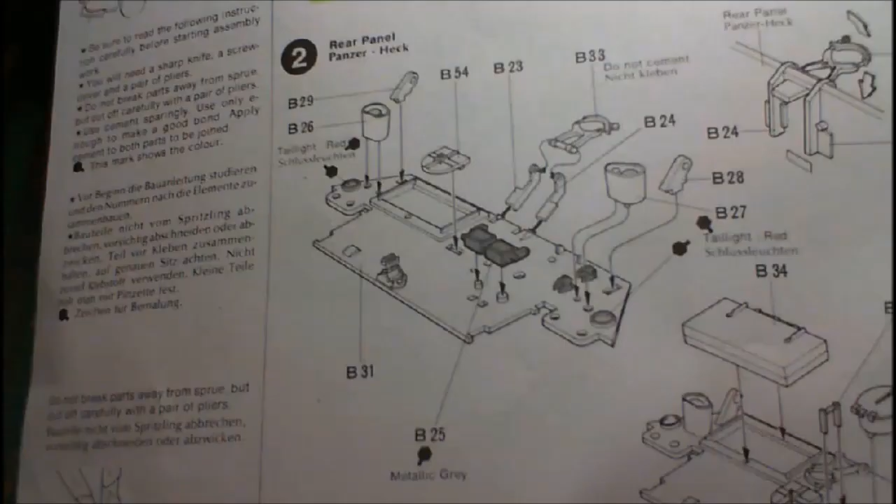Technical to the last, I'll give you all the technical explanations - fiddly things and jointy bits. So I'll get them done, come back then, as usual we'll have a look at that and see if there's any problems. When it came to the wheels, there was no problems, they just went together easy enough as we saw. Right, so I'm going to get step 2 done and come back, we'll have a look at it, let you know how all that went.

Okay, now that's step 2 done. Step 2, we have to get in the rear panel on - a couple of little bits and pieces that went onto it. We've got the travel lock for the barrel, that identification plate, the rear lights, lifting hooks, a bit of spare track. We've got a box of some kind, a round box of some kind, and 2 little thingamajiggies.

Like I said, watch this channel for technical information, you won't find a better one for technical information. And there we go, there's that piece all nicely made up now. And that piece is movable, that can pop up and down. Not that you can open it, but you can move it up and down - don't see the point, to be honest with you, but it works anyway. Lovely fitting of that piece.

Goes on the back there, and it is very strong. Usually a lot of these little fiddly things you're putting on little hooks and trying to get them in there, very, very fiddly, and that's with modern kits. This is an old 1979 kit, like I said, when we started off building this. And beautiful little fitting there on that.

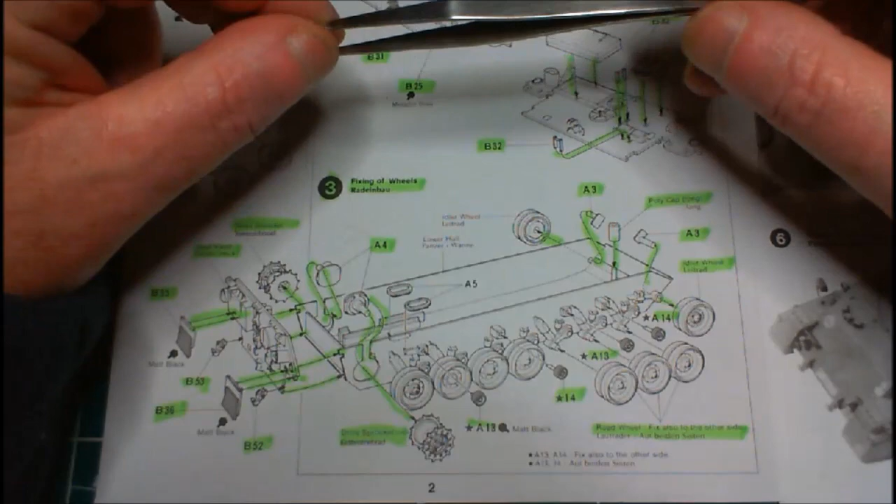Okay, here we are back with the instructions, and as you can see from all the little green marks, that stage is completed. I must say everything fitted together beautifully, it really did. No problems with fit whatsoever, no flash or anything to be removed - everything went together perfectly.

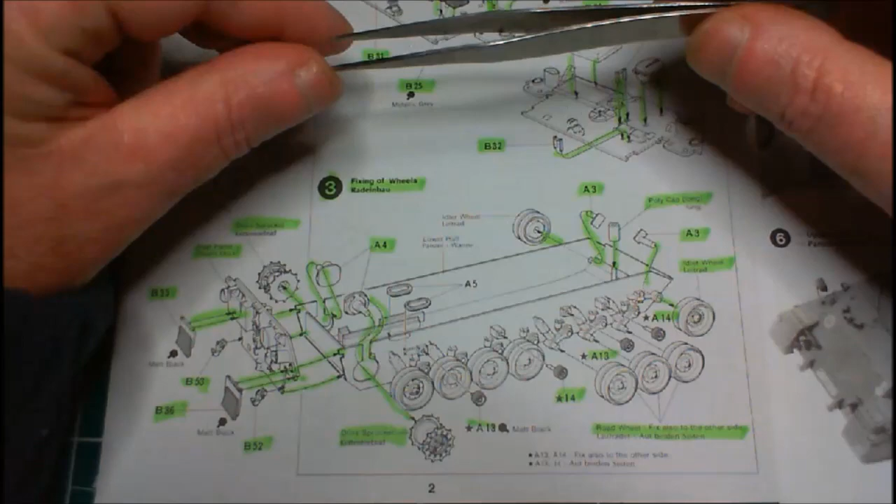Now, one thing I noticed going through the instructions - not that there are very many - is that at no point do they tell you about fitting the tracks, or when to fit them. I presume it's at this stage, because as you read through, the next step is the upper hull, then the turret, and basically putting everything together - and it shows the tracks already on this section here.

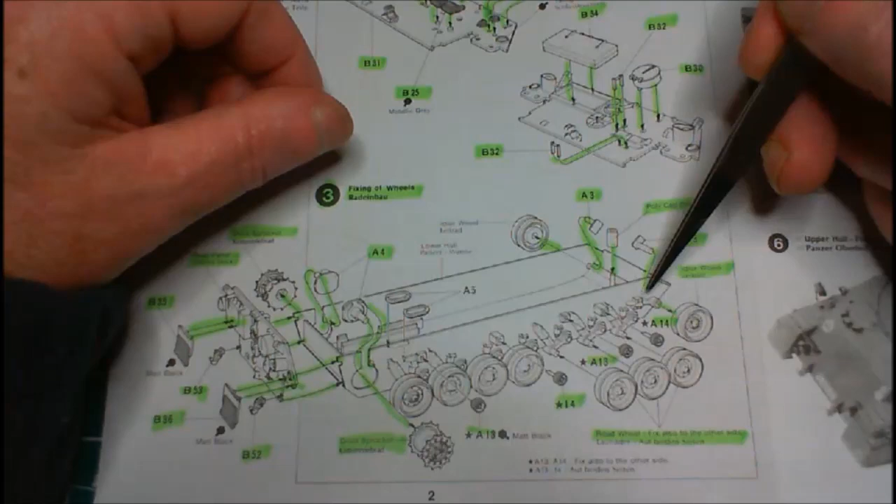Now, after going through a couple of videos of different people who've done this kit, one or two of them said the rubber tracks that came with it were extremely tight - yes, extremely tight. One person even said they broke the idler wheel mounting, probably this little piece here, when fitting the tracks, because they were so tight it just sort of snapped them in. He ended up having to get separate Meng tracks for it.

Okay, I'm after dry fitting the tracks - popping them in without heating or gluing them or anything like that. As you can see, they're not sealed off yet, but they fitted perfectly. They work - I had no problems with them whatsoever. So whether there was a problem noticed with earlier kits and they changed the tracks, I don't know, but these tracks so far - I haven't put the other one on yet, but I just did the one - and it's perfect. No problems with that.

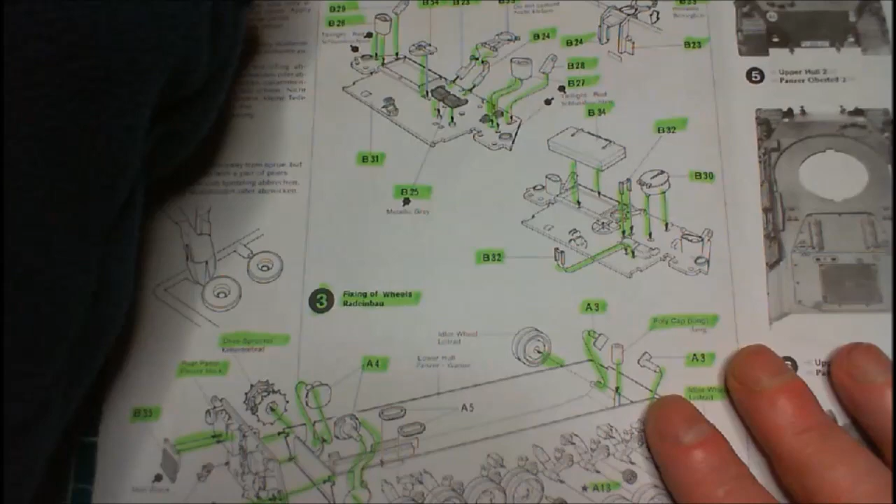We'll move on with the instructions and what we're on to next. I'll do the other track, and I'll do the sealing of the tracks as well. It's where you basically heat a screwdriver, pop them through like that, and then just seal them down, flatten it down a bit. Little hint with that is don't heat your screwdriver too much, under a naked flame of course, but don't heat them too much, and then slowly just mushroom the top of it so it seals it off.

As I said, I don't have a problem with those rubber tracks. Never really had a problem with any rubber tracks, but what the hey. Anyway, right, we're on now to the upper hull, and in step 4...

We're fitting on side skirts, some tools, and the big air vent there at the back. Step 5 is basically the same on the other side, as well as fitting this little piece here underneath, which is the little clip. It fits in under here, and it's the clip that keeps the top, joins the top and the bottom, under this section here, under that yoke there, so you can take your model apart and things like that. It's really for getting at the motor and changing the batteries out.

So let's carry on now with our instructions, and now we're onto the turret. First of all we've got to build up a couple of little sub-assemblies to get ready for the turret itself. We've got the smoke dischargers, left and right. We've got that main searchlight at the top.

That's a dual searchlight, I was looking up on that. It's both infrared and white light, so very nice.

We've got the machine gun, which, I can't remember the actual name of this one, but it's the updated version of the MG42, and it basically runs on the same concept as that, and it's still quite a formidable weapon used today.

We've also got our gun. It's a 2-piece barrel, well, a 3-piece barrel when you consider we've got the little top as well for it. Then we're fitting the light onto the gun mantlet and fitting in our gun itself. Then we're on to putting the turret sides and back and all that together.

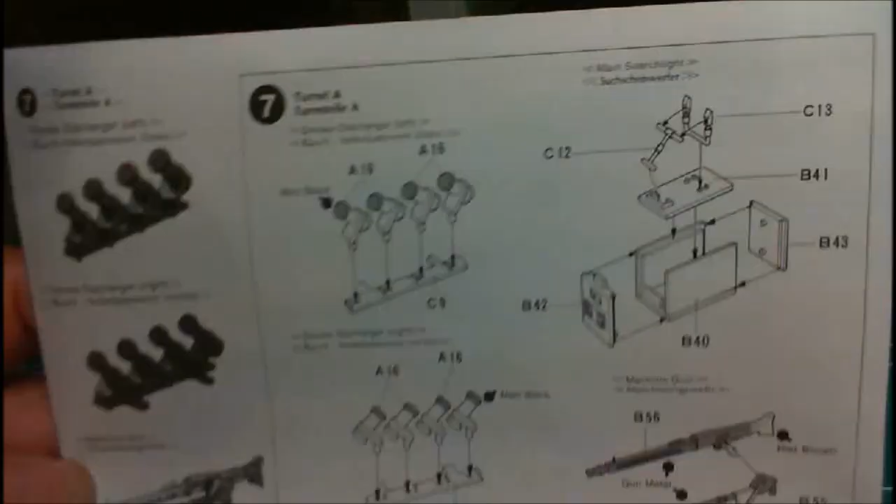So I'm going to get those 2 steps done, 7 and 8. Step 7 being a pile of little steps, getting all the little sub-assemblies done: smoke launchers, light, machine gun, main gun, and fitting all those little pieces onto the mantlet, then putting our turret box together. So I'm going to get them done, and we'll come back as usual and have a look at that.

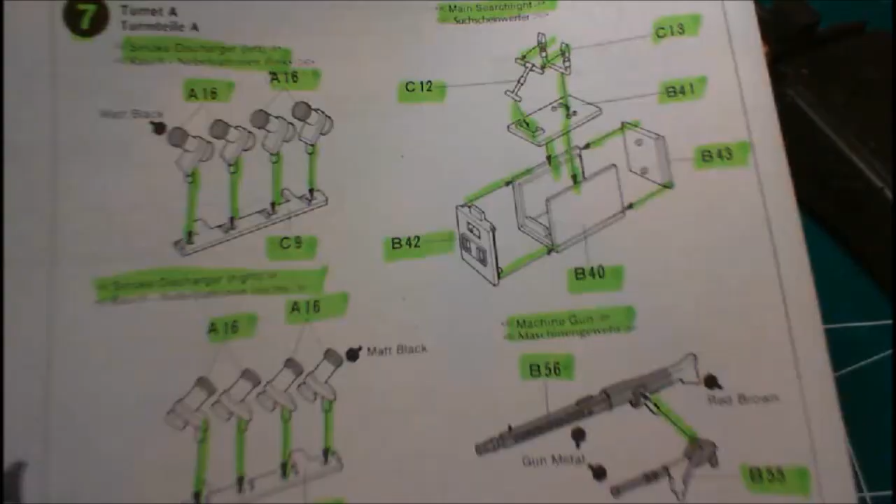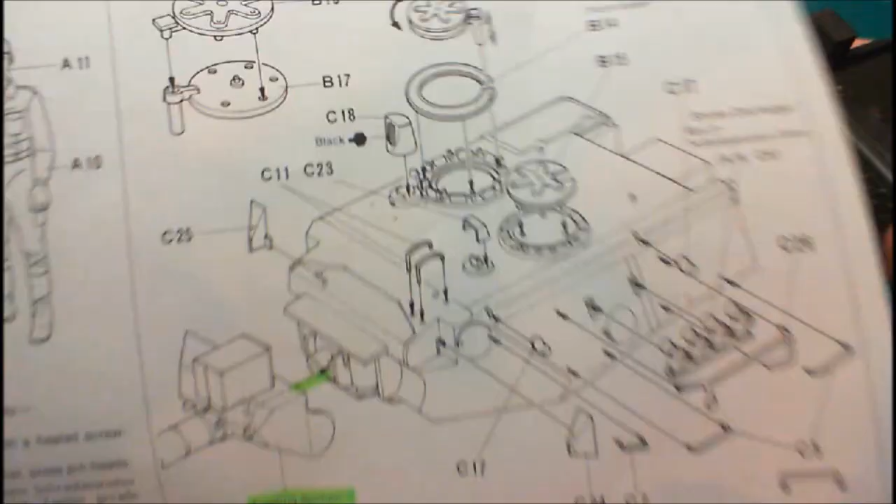Right, here we go. All those little bits and pieces are done - the smoke dischargers are done, the searchlight and machine gun. I've attached the searchlight to the front mantlet. The gun is in place, and the turret is all built up, as you can see beside me. I've also skipped a couple of little steps - I've put on the back plate to fill in the back, and fitted the gun onto it.

Now, before I move on, since this is basically the last step, before all these little fiddly bits go on, I want to go back over the kit, because there's lots of little places, like that deep groove along there. A couple of areas need a bit of filling to go over, and I'm after getting that line there okay now.

The only thing about it is, once you start sanding, you can see where all the sanded plastic sort of sits into all the grooves. So all you do there is simple - wet your finger and go over it. That'll remove all the excess bits of sanded plastic, and you can see the little grooves there.

I just want to use a tiny little bit of sprue glue filler, just to go along these little gaps here, because with all the little bits and pieces on it - the handles and things like that - you won't be able to go back in after that and do this. You won't be able to do all that sanding and cleaning up once all the little things are on, because you're going to end up breaking them off.

That's about it for the main body of the tank, but there's a couple of little spots here I want to clean up some of the joins and things, just for my own benefit, to make it look a little bit neater. Because if you don't, the paint will sit into there and you'll notice it straight away. So I'm going to go ahead and get those done, then continue on with the last few little bits and pieces to go on.

We've got some hatches and hatch covers to go on, a lot of handles to go on, the commander's cupola ring there to go on, and a couple of other little fiddly bits, more handles. On the last page, we just have to make up that conning tower. Whether I'm going to use it or not, I don't know yet, but we'll make it up anyway and see what it looks like on it. If I don't like the look of it, I won't use it, simple as that.

So I'm going to go on, get them done, and we'll come back and have a look at the finished article, as in the build part of it. What's left then will be the next video, and that will be the painting and weathering. So next time you see this, it should be all constructed, and we can verbally take it apart, if you know what I mean - go down through the build, whether it was good, bad or indifferent.

So there she is, construction's finished anyway. I've done the figure and I've done that conning tower thing. Let me just bring the camera up a little bit - you can see the conning tower and the figure as well. I'll bring it back down there again. Now, there's that figure - it's one of the typical old Tamiya figures.